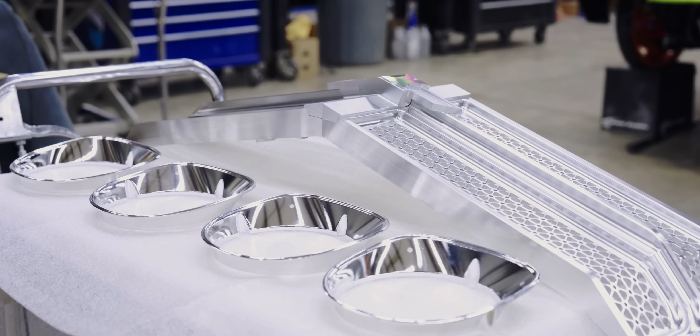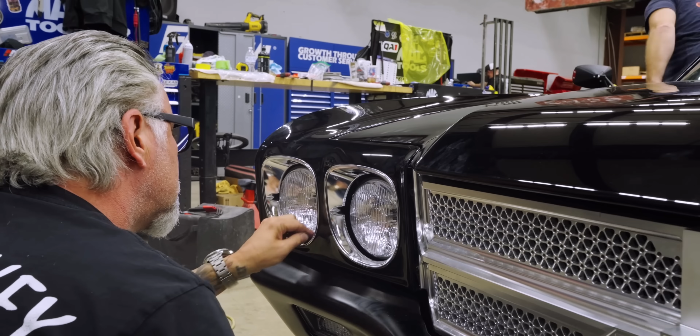Oh, you better quit, they match the wheels. In the front and the back, all we have is machined aluminum like we're looking at. We got Scotch-Brite, we can brush them real fast. I'm just kidding. Or what, probably $2,000 a piece for a headlight bezel? We're in there now, ain't no going back. Just gotta beat down the shine a little bit.

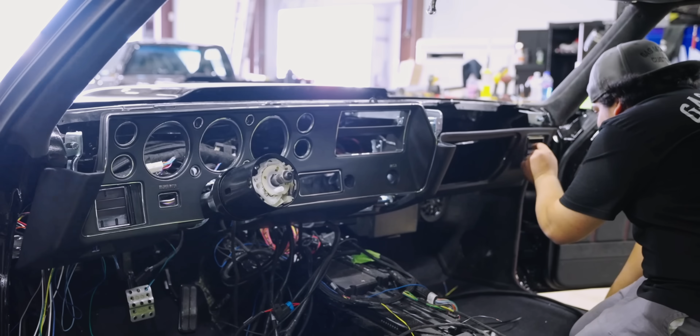So today, we're gonna be reverse engineering and then machining this headlight bezel for a 1970 Chevy Chevelle. It's a custom build that Gas Monkey Garage is doing for SEMA this year.

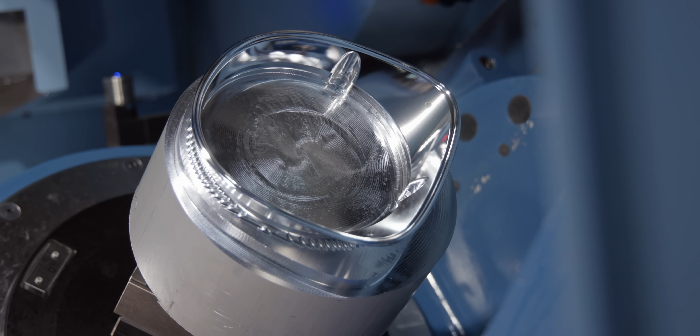My first thought was to do this part in 2 operations with a fixture for Op 2, but I realized there's a smarter way. We can do it all in 1 operation and save ourselves all that hassle. The main things that stand out to me on this part are the almost mirror finish on the inside, and the super thin walls. This part's only 60 thousandths thick.

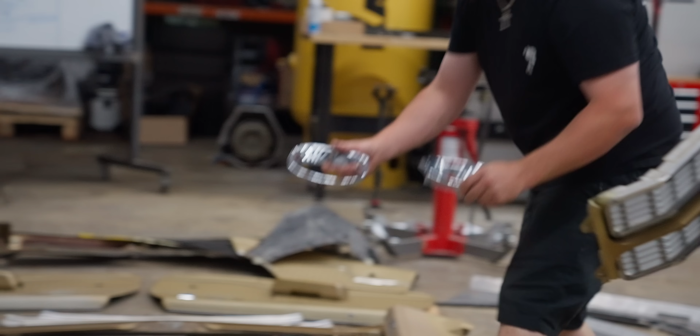Since we're reverse engineering this, the first step in the process is getting this scanned by our buddies over at Dynamic 3D. We started with a 3D scan and then I built the model off from that.

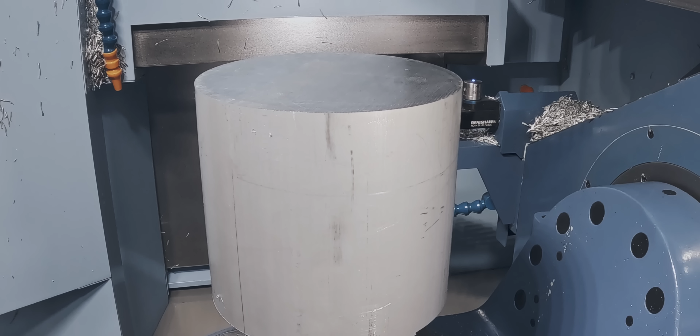I decided to make this part out of 8-inch long pieces of aluminum. That way I can just dovetail one end and I'll be able to get 4 parts out of each piece without having to load more material into the machine.

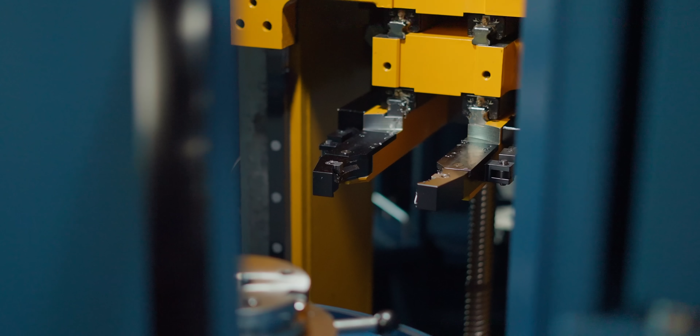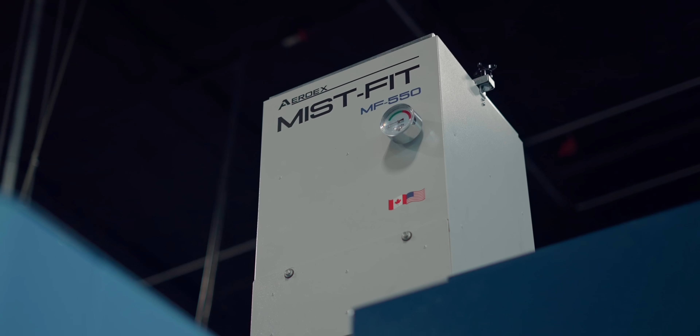I'm running this on our Matsuura MAM 72-35V. This machine has become my favorite machine in the shop. Usually on a 5-axis trunnion style machine, you're gonna sacrifice some rigidity for the added versatility, but that's not the case with this machine. It's as rigid as anything we've got in the building.

We started the process off with a KOR 5 Kennametal end mill to rough out all the material around the outside and the inside of our part. Then we come back with a 1/2-inch 3-flute end mill to clean up the smaller radius areas in the middle of our part.

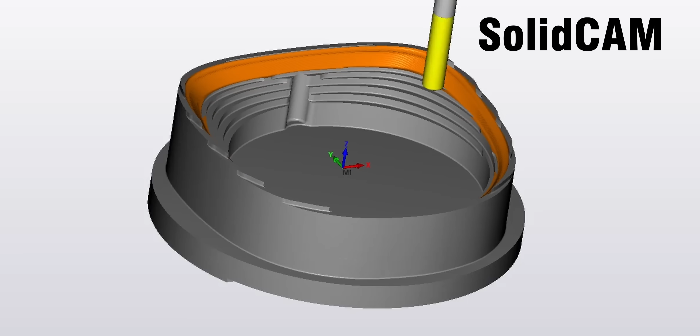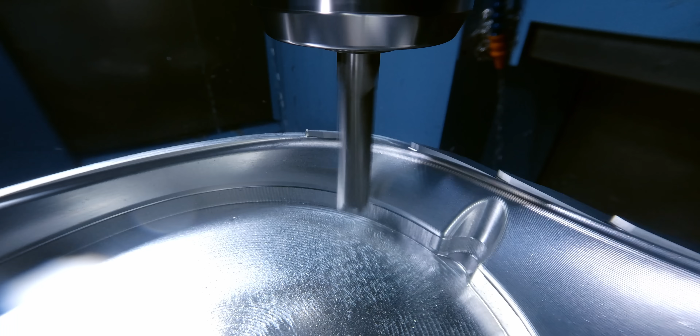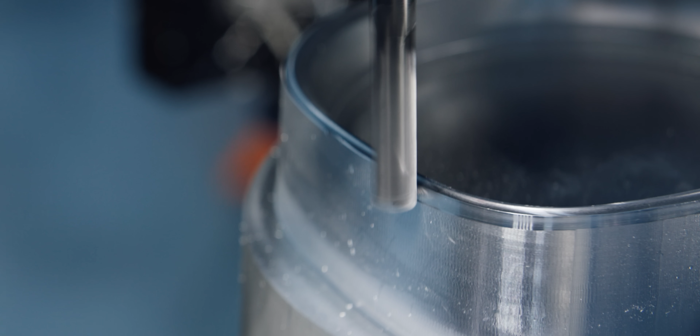And then we semi-finish the whole inside with that same tool. To use the MCD tool, you have to leave between 1 and 2 thousandths of material for that tool to run properly. Because we're only leaving 1 to 2 thou for the MCD tool, we have to basically finish the inside of this part twice. After we finish the inside, we swarf cut the outside profile, and then we're on to the MCD tool.

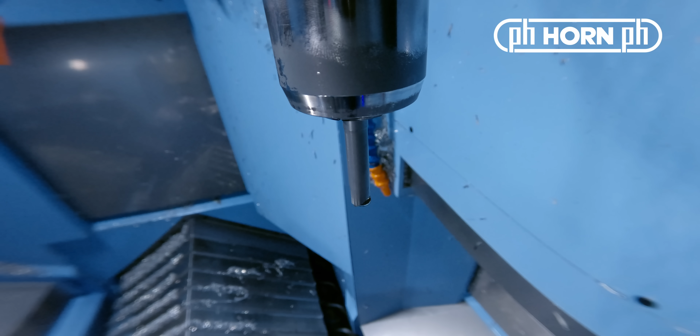The ball end mill that we're using to finish this part is a specialty tool made by PH Horn. It's a monocrystalline diamond insert that's brazed onto the carbide shank of the tool. The great thing about this MCD tool is you can run it at really high surface footage, so we're gonna spin it at 18,000 RPMs, and we can feed it at 100 inches a minute and still get that great finish.

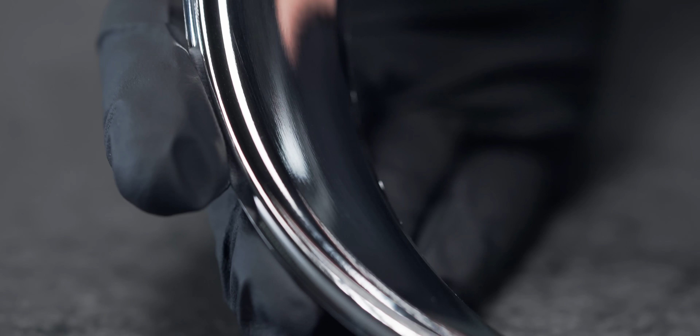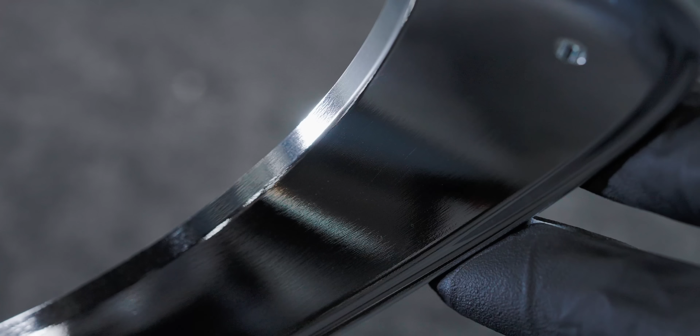Our original part has a mirror finish on the inside, so I'm gonna take a 2 thou step over with the diamond tool to match that surface finish. If I didn't need quite that good of a finish, I could use a 5 thou or a 10 thou step over to cut down on the cycle time and still get a better finish than with a ball end mill.

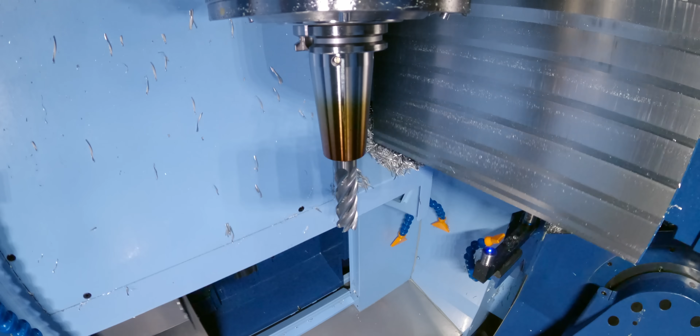After we finish the inside of our part, we're gonna rotate to A90 and start roughing out the back of our part. We're gonna do that with the Core 5 end mill that we've already used, and then we're gonna come back in with that 1/2-inch 3-flute end mill as well to rough out as much material as we can to have good clearance for our finishing tool.

After we remove the bulk of the material on the back of our part, we're gonna run a semi-finish and then a finish pass with a long 1/4-inch ball end mill.

The finishing operation for the back of our part ended up being a totally rotary tool path. So it's only 4-axis simultaneous, but I did program it using SolidCAM's 5-axis strategies.

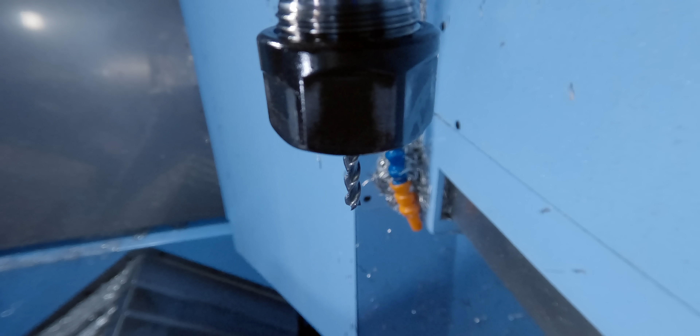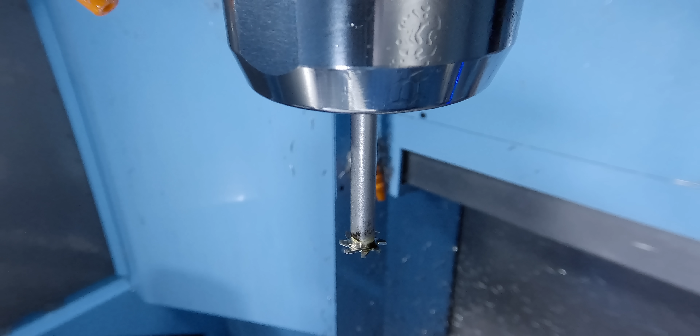After that, we're just going to use an 1/8-inch end mill to do our 2 angled holes that break through from the front of our part to the back. And then to tab off our part, we're going to use a 1/2-inch .031 slitting saw in 3 sectioned cuts.

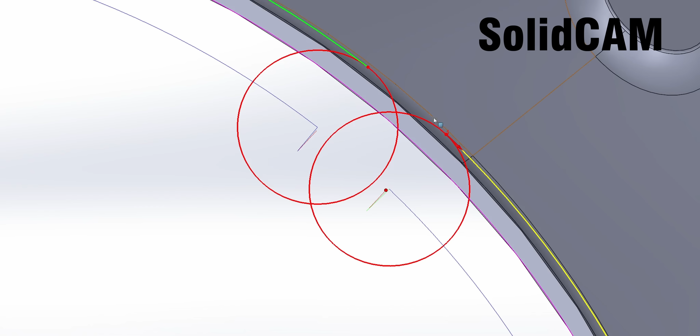It's kind of cool how SolidCAM's geometry tab works. I can actually see the start and end points of each of the sections I programmed. This makes it really easy to tab the part off because I can see exactly what's going to be left over after we run this tool. So I ended up leaving 3 20-thousandths triangles around the inside of my part.

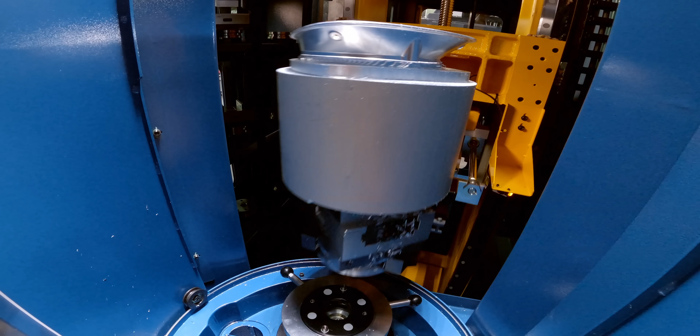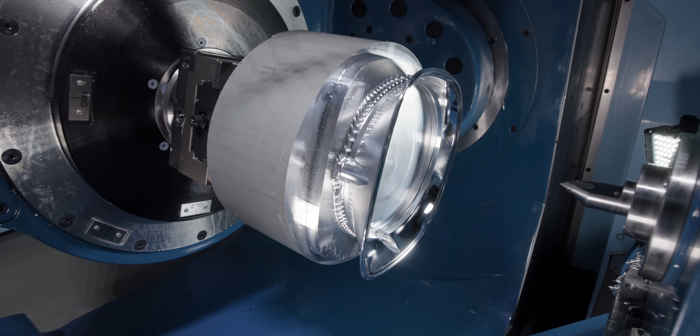All right, so now it's time for my favorite part of any machining process, hitting stuff with a mallet. If I hadn't run this part myself, I wouldn't have believed you could get a finish this good straight off the machine. That is purely straight out of the machine. That's nuts. Here's the problem, they're so freaking perfect.